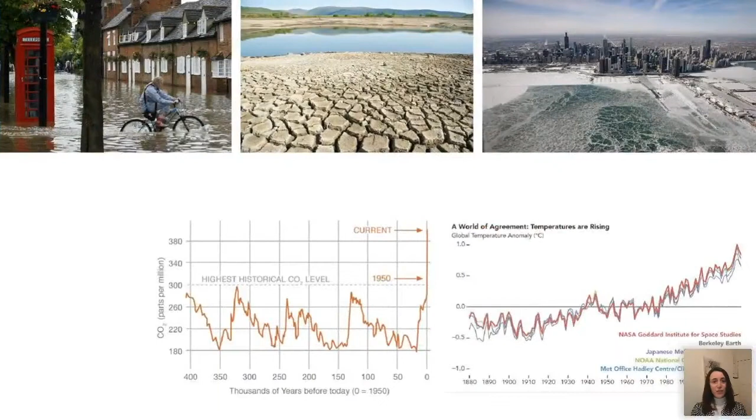So we are going to start with the presentation. First, before getting into the nitty-gritty, we want to give you a bit of background information.

Normally, the highest historical CO2 level has been around 300 maximum, and from the 50s, it has totally rocketed, and now it's over 400. We are following a trend that doesn't seem to stop, so CO2 emissions continue to grow.

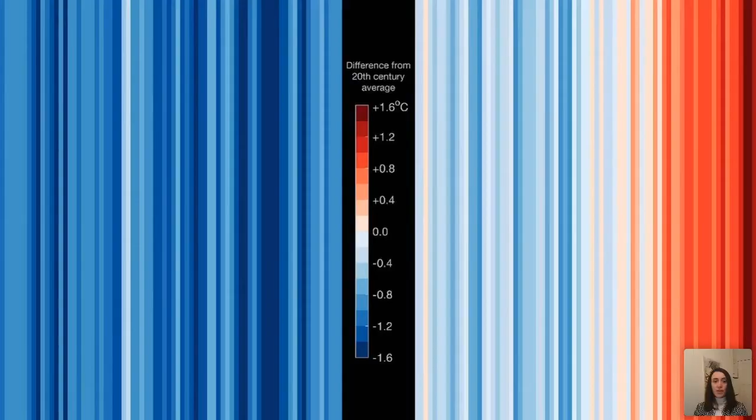But here we're going to talk about something positive, like what can we do? What can the built environment do to tackle climate change and to create sustainable cities?

We want to show you, as built environment professionals, to empower you and to show that we have a key role to play in tackling climate change.

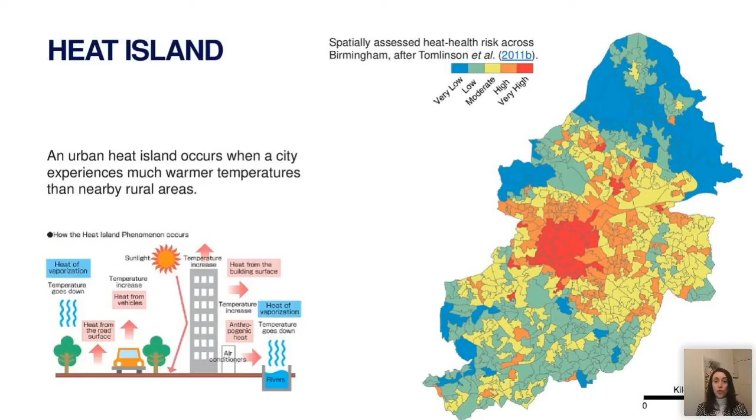And we can see the same with London. Temperatures in London are always some degrees higher than in other parts or in other cities in the UK and in other rural areas.

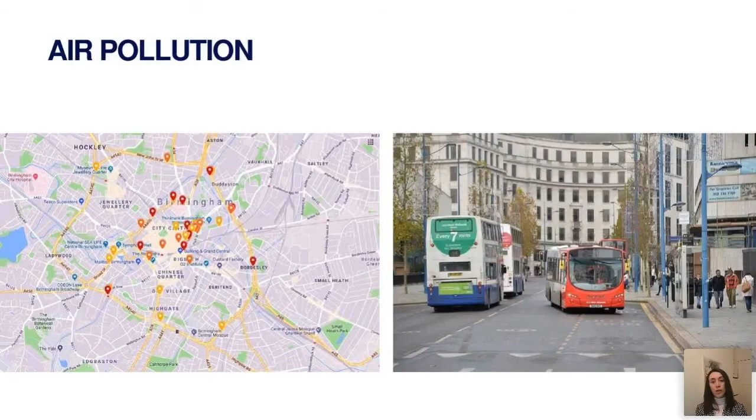This is regarding cities, but also the buildings that are in those cities. They also play a role in increasing the CO2 emissions. Cities in the end are responsible for over 70% of global energy consumption and CO2 emissions, and of that 70%, 40% is from buildings.

During the construction of those buildings and the extraction of materials, what we call embodied carbon, through all the construction phase, and then even the operation phase of the building, when we are, for example, in our houses, we are heating our houses.

That's the operational emissions. One thing is, in the UK, the building stock, our houses are quite old, and now there are targets of net zero carbon houses by 2050. But most of the houses that exist now, and the houses that we're going to build now, will still be there in 2050. So it's now when we have to act, now when we have to design houses that meet net zero carbon targets.

Also, at the moment, renovations affect just a very small percentage of buildings. So it's imperative, not just to design new houses that meet net zero carbon targets, but also to look at existing buildings. We really need to renovate and refurbish buildings to make them energy efficient.

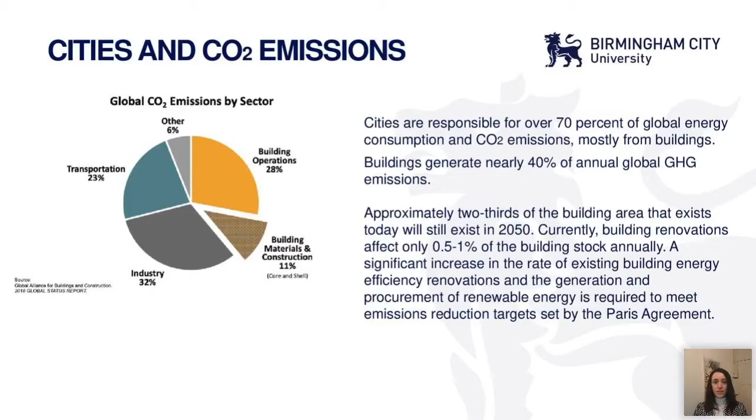One of the points we want to put across tonight is that we all work in the built environment. We contribute to cities from different angles. We have skills and competencies that are complementary, but we also work at different scales. In planning, which is my discipline, we work at a wider scale, looking at cities, regions, interconnections, and we also go down to smaller scales, the residential area, the community area.

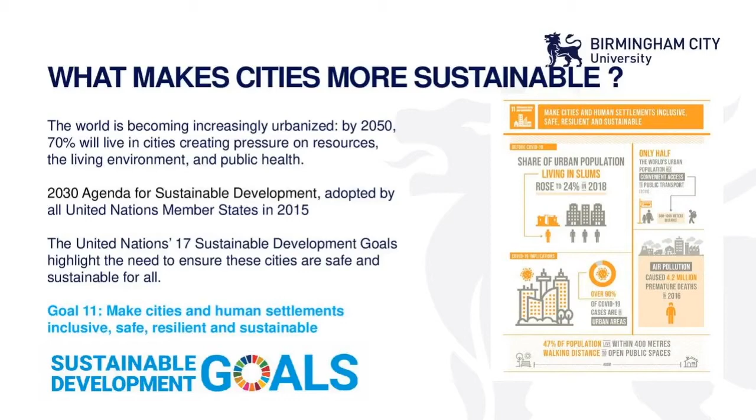So the question for me is about what makes cities more sustainable and how we can contribute towards that important target. A few considerations that complement what Monica was mentioning before: the world is becoming increasingly urbanized, and this was taken into account in 2015 with the 2030 Agenda for Sustainable Development, which you're probably familiar with. So what is it that planning can do for sustainability?

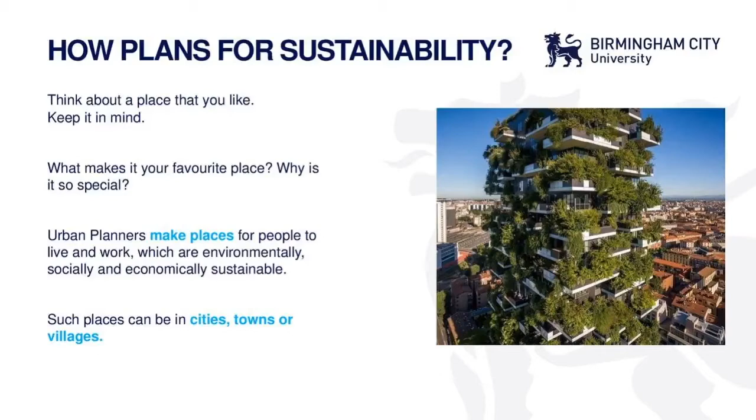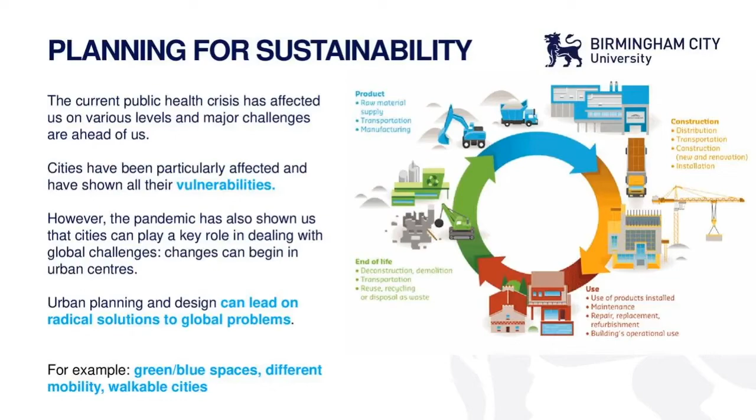I'd like to invite you to think about a place, some towns or villages, in very different contexts. The way we design cities and communities, and the pandemic, has shown us that cities can play a key role in change, and that these changes can have long-lasting positive effects in relation to global change. So I'd like to focus on open spaces, different forms of mobility, and different ways of designing and planning locally.

During the pandemic, new light was shed on how we experience cities and different spaces. Green spaces have shown to be extremely important on a daily basis, as a way of leaving our houses, doing some exercise, being more mobile, and generally finding areas contributing to our well-being. So proximity to green spaces has proved vital on a daily basis, particularly for our well-being.

Larger parks can provide locations where people can walk, run, cycle, play and train, while smaller gardens closer to where we live, in our neighbourhoods, have been a daily destination for a great variety of people, including families and children when playgrounds and schools were closed. So green spaces can play an important role in cities, environmentally and socially speaking.

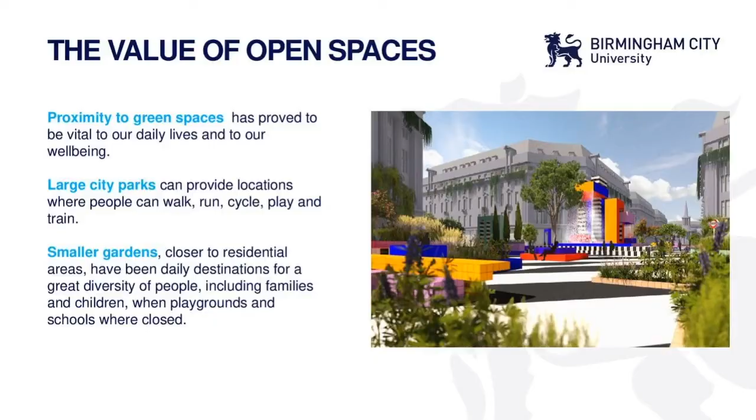Green spaces can vary in size and format. So when I talk about green spaces, I don't only mean large parks, but also local allotments, community gardens, and pocket gardens. Green spaces have a very positive environmental role: they absorb CO2, release oxygen, and play a great role in relation to biodiversity. But they also offer opportunities for leisure time and well-being. Recent research into the physical and mental health benefits of time spent in green spaces shows that even just spending two hours a week in a green space can have long-lasting benefits.

We've mentioned the mental health benefits of spending time in green spaces, but they are also socially very important. Green spaces are suitable for different types of activities and engagement, perhaps at different times of the day or week, and in that way they accommodate different members of communities and different age groups. So green spaces hold great potential for being inclusive and diverse environments. Together with green spaces, we cannot forget blue spaces.

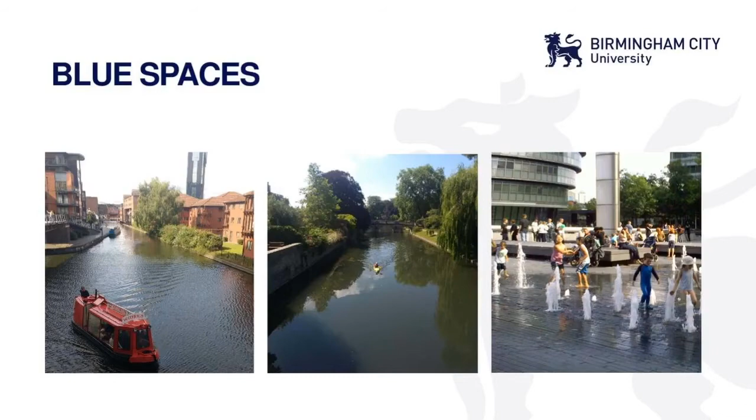And again, blue spaces can be of different types, and the benefits of blue spaces in relation to the physical and mental health of people has been proved. So facilitating and allocating such spaces in cities, in communities, is extremely important.

We talked about open spaces as very important, whether green or blue, for the environment and for people. The second aspect extremely important for our cities that has been emerging quite strong is walking, running and cycling in the city as an alternative to private or public transport.

This is particularly important because a large number of people live in urban areas where pollution levels are often well above the legal limits, and that has affected us health-wise in different ways, with respiratory issues but also increasing the chance of early death. Another important aspect, particularly for the purpose of this session, is that outdoor pollution affects indoor pollution. So what happens in the cities is actually affecting our own indoor space at home.

So how can we make our cities and communities walking, running, cycling friendly? How can we reclaim cities from traffic? How can we encourage cycling across different age groups, even children, on their own bicycles?

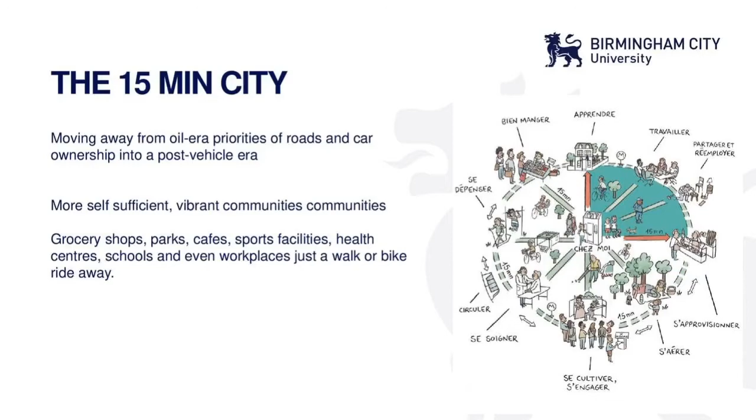So how do planners work? I would like to show some of the work that our students produce, and also give you an idea of how we approach cities, neighborhoods, and relate to city spaces.

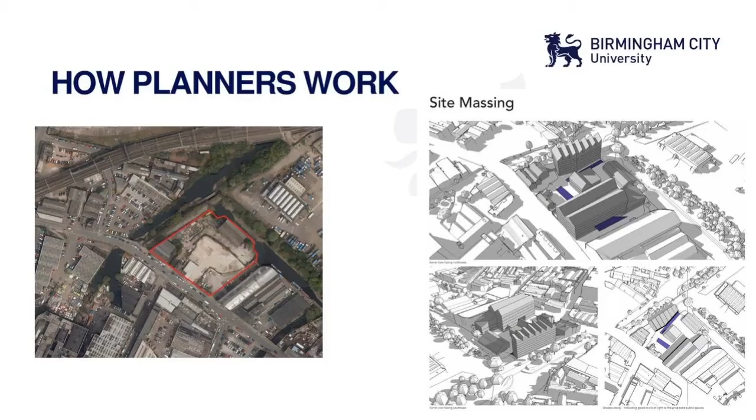What we do is work across different scales. And what we look at, as I mentioned earlier, is the big picture - how sites are connected with each other, how they are connected within the city, what happens in terms of new infrastructure, for example new developments, and what is likely to happen within a period of 10 years.

We also relate to other, more specialized built environment knowledge, for example on the environment, on green infrastructure, on biodiversity. As the student was highlighting, we looked at this specific site in Birmingham and how it is related to green infrastructure, how it is positioned, for example, with historic canals, and this can offer opportunities for rethinking how we can transform this empty or almost empty space.

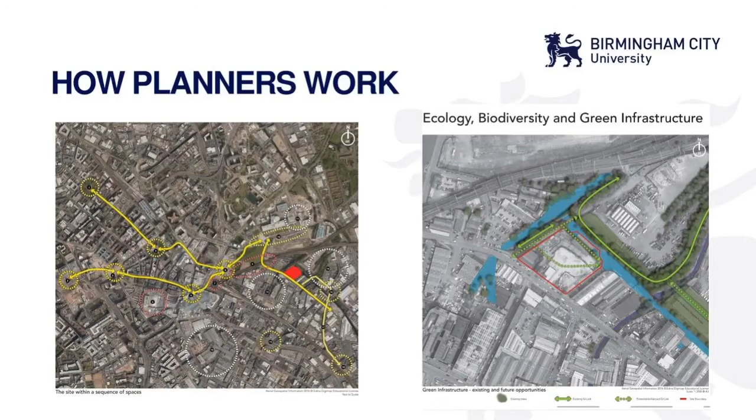So we need to think about how this relates to the multiple things that happen around the site. This could also mean looking at the surrounding land uses. What happens around that? Are there new developments coming up? Are there listed buildings? Is it perhaps a conservation area? Or is there a new major infrastructure, like HS2, coming up nearby? And what does that mean for my site, my area, and what are the implications for the future?

It was also important to look at the constraints, but also the opportunities that this site in this specific context might offer differently, for example, from other areas in a city context.

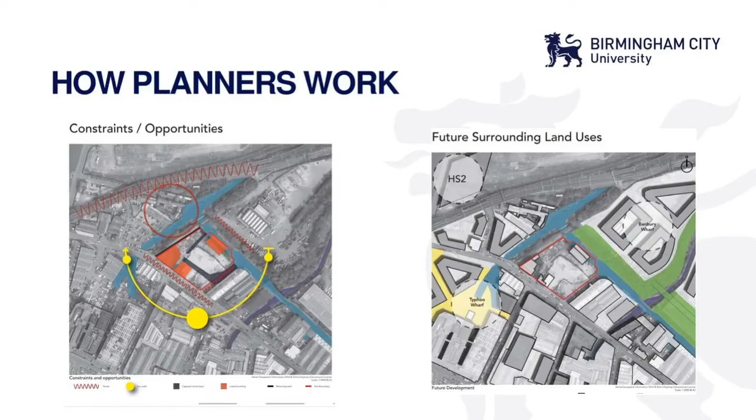Again, the context is important. What happens around it, what happens in terms of current connectivity, but also future connectivity, how my site is going to be accessible. What does it mean for it? What are the implications? Is it permeable? Is it easily accessible? Or is it something that I need to take into account to make it more attractive and more lively with a possible future transformation?

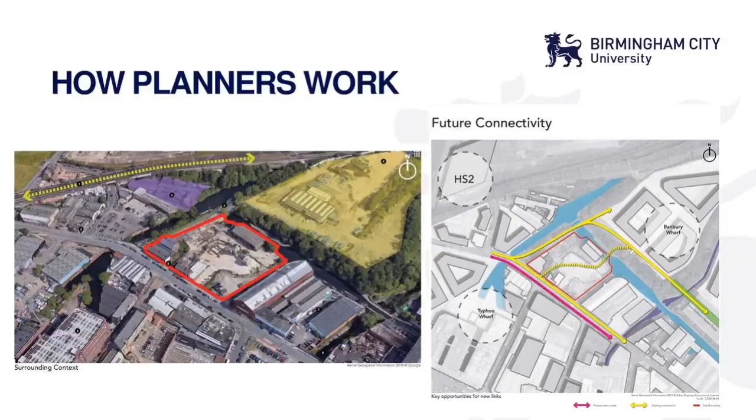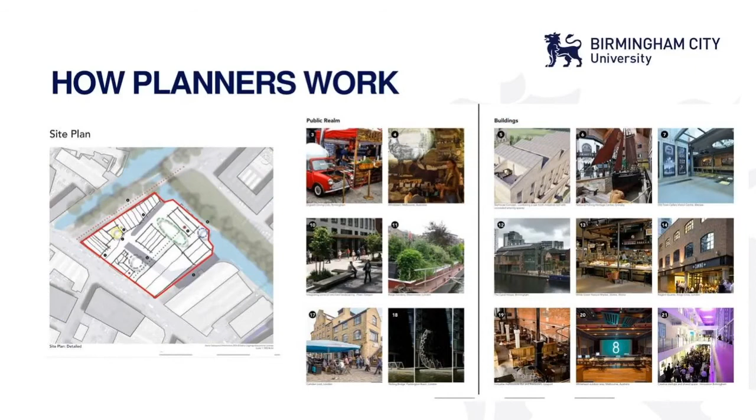And we also look at examples, cases. We draw upon other case studies, ideas, as the student did in this case, in finding ways to inspire possible transformations within a specific site and make it distinctive, a distinctive place that think in terms of environment, think about the social elements of the people who are going to use it, think about economic elements and the future of this part of the city, not as a site that is limited and bounded in itself, but talks and looks at the city and the future of the city.

Okay, thank you, Sylvia. And Sylvia has been talking about the perspective from cities. How can we make cities more sustainable? I'm going to cover now buildings, but both of them are linked because what happens outside influences what happens inside.

So I'm going to give you like a sort of an indication or a recipe of how can we make buildings that are not just sustainable in terms of carbon emissions, but also resilient against climate change. And on top of that, how can we create buildings, not just that they're sustainable and resilient, but also that provide healthy indoor environments for the people that live inside those buildings.

And we've seen that with COVID now. We are now spending a lot of time indoors, and maybe our indoor environments are not as healthy as they should be. So it's something that the professionals of the future will have to start thinking about.

And I always like to bring this slide because I always say that that's my motto. The cheapest energy is the one that is not consumed. So that's the best one. If we can design a building that doesn't consume any energy, that would be great because then we wouldn't have any emissions. But that's a bit tricky. That's a bit difficult. So we need in the end to find a balance.

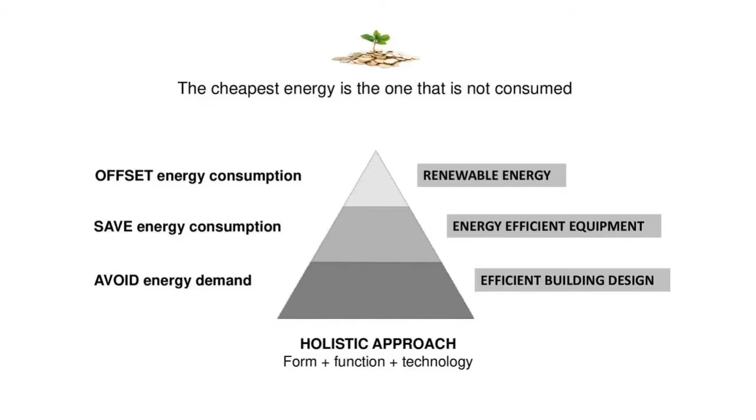After that, the second step would be, let's install efficient equipment to save energy consumption. And at the top, it would be installing renewables to offset any energy consumption. And it has to be always that way, because sometimes people, if they don't look at the buildings in a holistic way, and if we work in silos, we are not going to meet the net zero carbon targets, and we won't do a good job in that sense.

But as I said, we need to think also in how we can provide healthy indoor environments. So just I've been talking about that pyramid to conserve the energy, to make buildings very, very energy efficient, to seal them up, to make them very airtight. Imagine a bag. Imagine if you have a plastic bag and you seal that plastic bag so the air cannot go out and cannot come in.

And that's a problem in a house. Imagine that you don't ventilate. Imagine that you are in your bedroom watching TV or doing your homework. If you are in your bedroom, if you don't open windows, if you have everything closed, what happens after an hour, after 2 hours? It starts getting stuffy because the CO2 starts building up.

So the point of making houses very airtight, to sealing them, to meet the targets, to improve the energy conservation and to reduce the energy bills, is that we create unintended consequences such as poor air quality and overheating. So we need to find the right balance of how to improve energy efficiency of buildings, to create sustainable cities, sustainable buildings, and tackle climate change, but also creating healthy indoor environments.

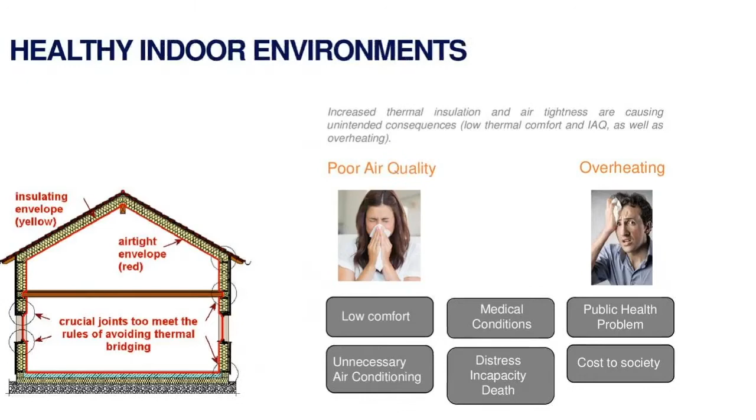How can we do that? Well, this is like a sort of recipe of how we can improve the energy performance, but providing healthy indoor environments. Following with that pyramid, we would have at the bottom things such as passive design. We need to first look at the site and to create a resilient and a good design, looking at thermal mass, buffer zone, super insulation, some concepts that I'll explain in the next slide.

As we mentioned before, efficient equipment, and at the top, renewables. But I'm adding some other bits for new homes and existing homes to make sure that we don't just improve the energy performance, but we also improve the air quality and provide healthy indoor environments.

Such as emission of materials. Some of them have particulate matter or volatile organic compounds, so low emission of building materials. Ventilation, that's key, as I mentioned before.

Equipment and appliances, they have to be low pollutant. For example, wood burning stoves or gas stoves can emit nitrogen dioxide. So we need to think about what sort of appliances we install. Also the extractor fans in kitchens, we really need powerful extractor fans to extract all the pollutants from cooking. We'll see an example later, and you will be impressed by that.

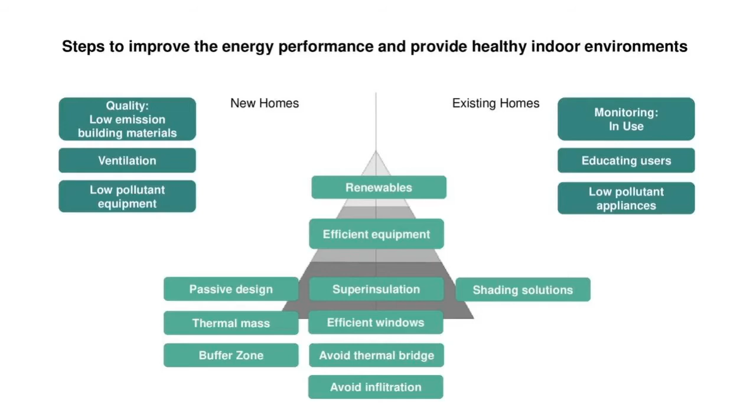Also monitoring, because by monitoring and seeing what's going on in your house, it's really interesting, because in the end, you make some choices that you wouldn't make if you didn't have those monitoring sensors.

So as I mentioned, things like passive design. When we mention passive design, things to consider, such as harnessing the power of the low winter sun, but also preventing overheating in summer, making the most of the natural ventilation.

Thermal mass is the ability of a material to absorb and store heat energy, and then it absorbs during the day and releases the heat at night. That's thermal mass, and there are some materials that are better for that than others.

Buffer zone is about the layout of the different rooms in the house. Cold rooms should go to the north, and warm rooms should go to the south. That's buffer zone. And also shading solutions.

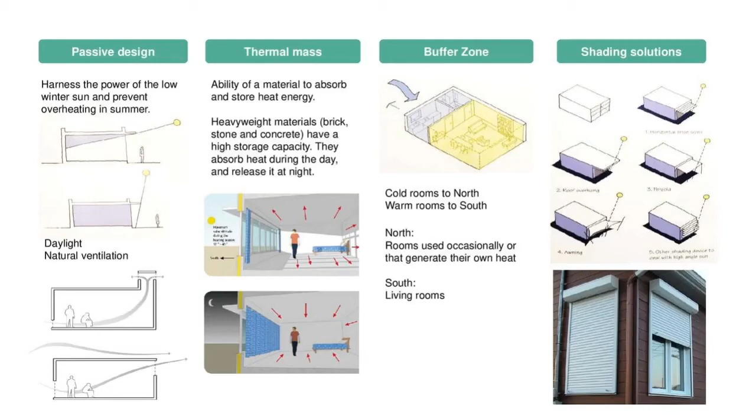With the warming temperatures, we are seeing summers that are hotter and hotter, and the temperatures are rising. We are starting to see more problems with overheating. So why not think of shading solutions? Because if we don't let the sun in, then we will have fewer problems of overheating.

Here, for example, are some examples from our students showing how they analyze the sun path and the prevailing winds, not just by drawing with concept sketches, but also using software to analyze the sun path.

On the right hand side, it was for installing a PV panel, and also for the design of the building. It was an existing building, and students had to do a low carbon refurbishment. So we analyzed the sun path, and other things like prevailing winds, or where the trees are, or other constraints.

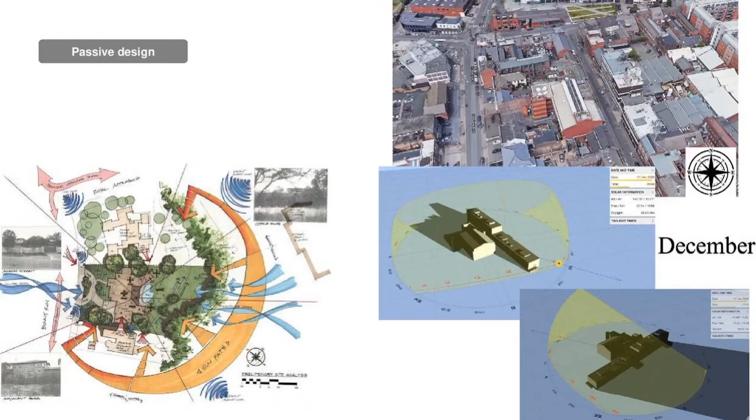Also, in terms of insulation, we need proper insulation. You can see there a little drawing of a house showing the typical heat losses through the roof, walls, floor, and window, which are normally around 25-30%. If we improve the insulation of the roof, walls, floor, etc., we'll conserve quite a lot of energy in our houses.

The thing is, we can insulate either on the inside of the house or on the outside, as you can see on the left hand side. Also install good and efficient windows, double glazed or triple glazed, as we would do in a passive house.

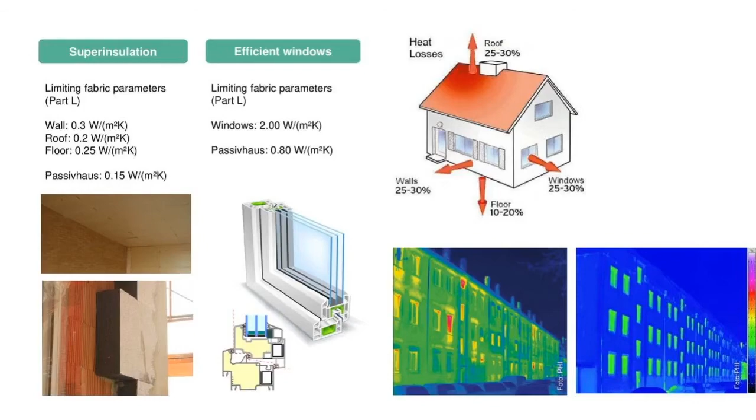On the right hand side at the bottom, you see the same building before and after installing external insulation, captured with a thermal camera. You can see there is a huge difference in the performance of that building after installing the exterior insulation.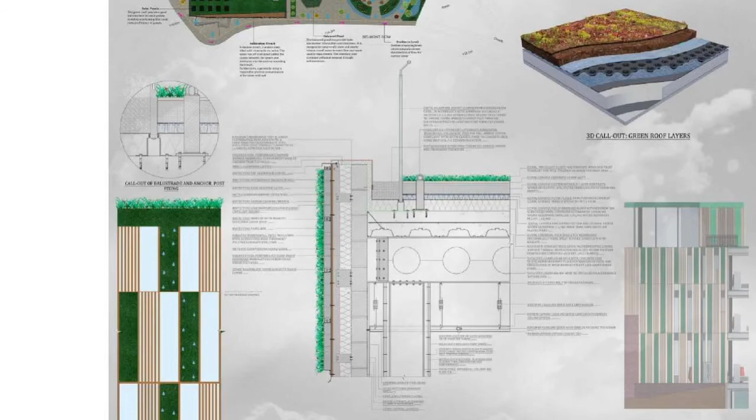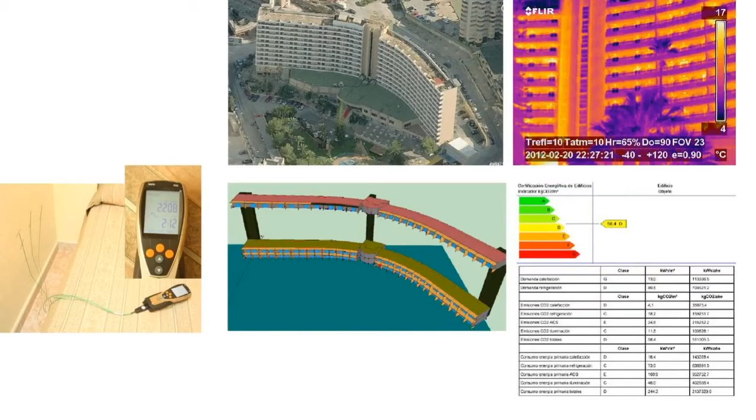But not just projects from students, also our own research, the sort of research that we do, which we also bring into the classroom, and then students can work on those case studies.

This is an existing hotel where, with a thermal camera, we looked at the heat loss, the key areas where there was more heat loss from inside the building. We also used equipment to monitor the U value, the thermal transmittance, and with that data we put it into software to calculate the energy performance specific to that building. From that, we can propose solutions for improving its energy performance, and students can also work on these case studies.

For improving energy performance and avoiding heat loss, it's very important to address thermal bridges. A thermal bridge, sometimes called a cold spot, is where there is a discontinuity in the insulation and heat escapes, because heat always transfers from where it's warmer to where it's colder.

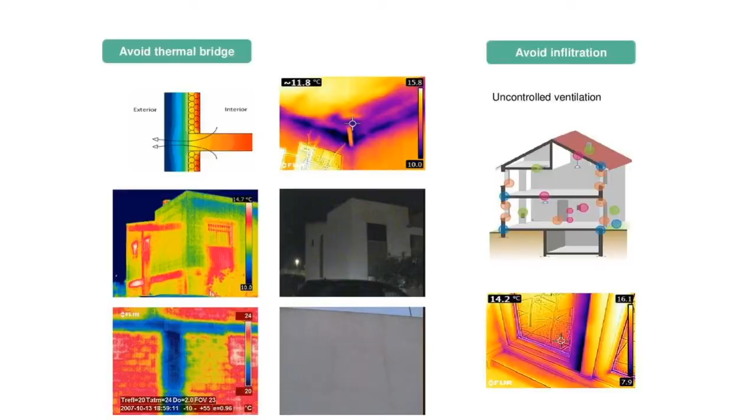This is a project my students did last year, on the School of Jewellery in Birmingham, which is a listed building. We took photos with the thermal camera. Some of those windows are single glazed because it's a listed building, and the thermal images show there is considerable heat loss through the windows. So students had to propose measures to improve the energy performance of that building.

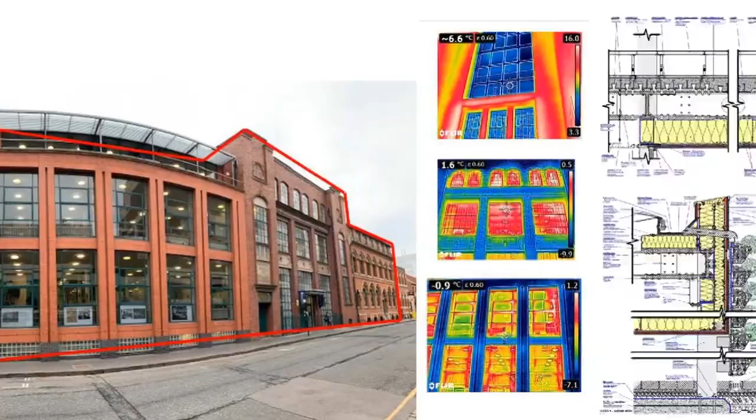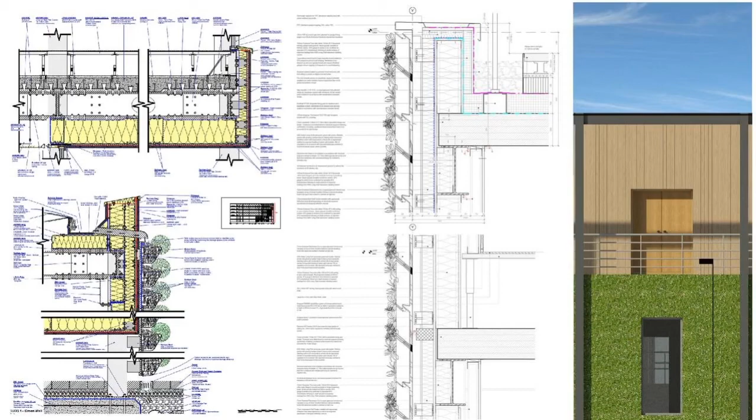Also, architectural technology students in their final year have to design a building and create all the technical details. In these details you can see there is no thermal bridge - the insulation is totally continuous - but at the same time the designs are really interesting and novel. This demonstrates that we can have buildings that are appealing, with very good design, but also sustainable and energy efficient.

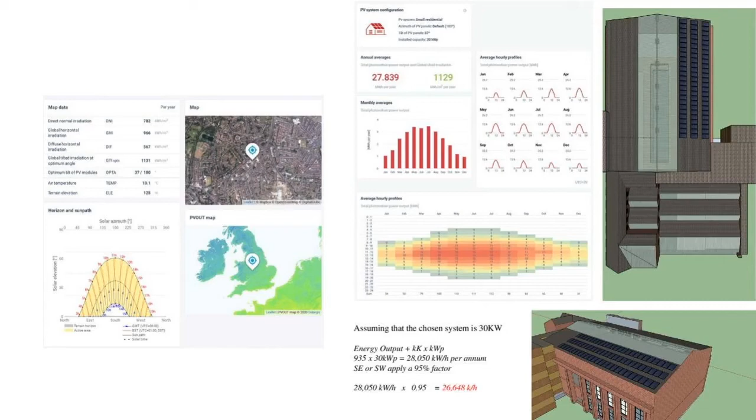As we mentioned, efficient equipment and renewables are important. Here's another example from a team of students that installed photovoltaic panels, and they did all the calculations to make sure they had the right number of panels to meet the demand.

As I mentioned before, low emission building materials matter. For example, some carpets and paints have high emissions, so we try to reduce that.

Monitoring - we can monitor lots of things: temperature, humidity, carbon dioxide, carbon monoxide, even ozone levels, since there is ozone also inside our houses. Nitrogen dioxide doesn't come just from traffic - if we have gas stoves or burning stoves, we'll also get nitrogen dioxide and particulate matter, pollutants that are not healthy, particularly with long exposure. If we're exposed for a short time, just an hour or so, it's fine.

The point is, when there is continuous exposure to those pollutants, in the end we want to be comfortable. The comfort temperature is between around 19 to 22, 23 degrees, something like that. And the humidity to be comfortable is from 40 to 60%.

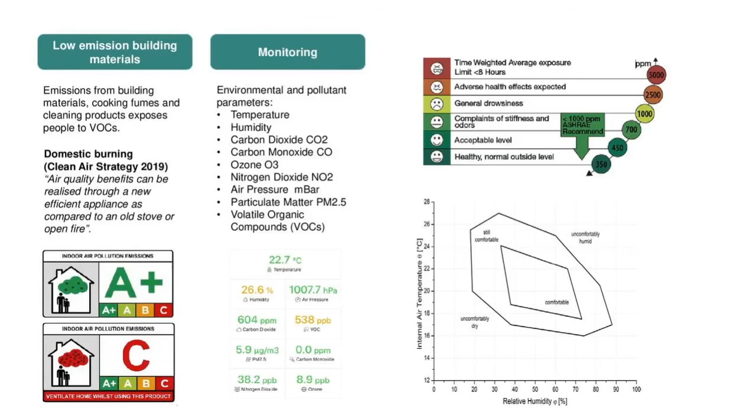CO2 is also important. If we don't ventilate, once we go above 1,000, it starts to feel stuffy, and then we have headaches, drowsiness. So these things are important to be in indoor spaces and to feel healthy.

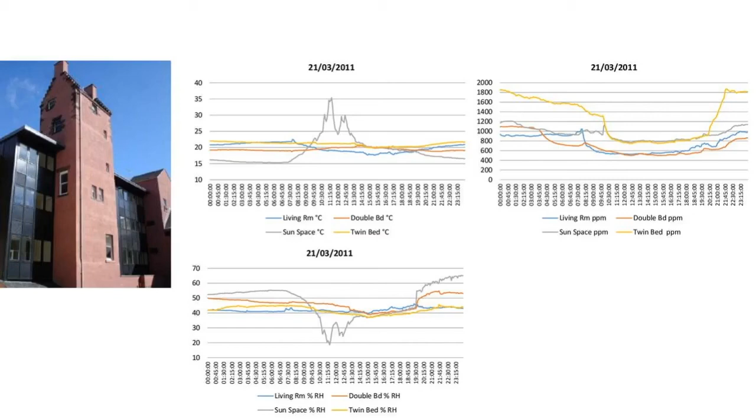So we have monitoring sensors, and we analyze these things. We monitor indoor environments, and we also do some research activities with students.

This is another example, from a gas stove doing a normal roast, the typical Sunday roast that maybe our parents or we cook during the weekends. You can see if we do it on a gas stove, the levels of nitrogen dioxide are really, really high, they go up to the top. That's really interesting and also dangerous.

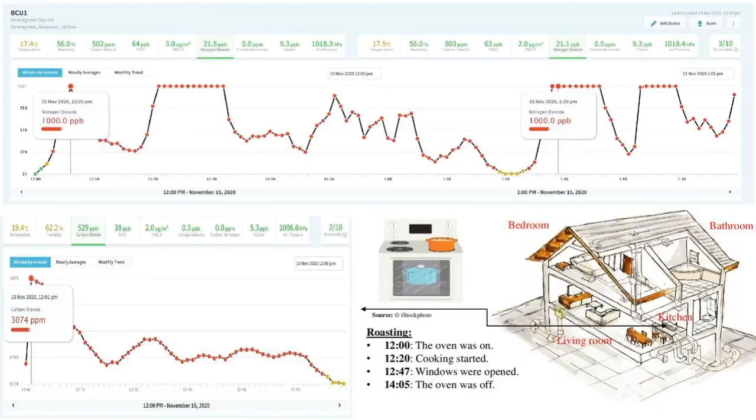So up to now, after showing a bit of a recap, the key things to consider for having buildings that are energy efficient, resilient, and also provide healthy indoor environments, what can we do as professionals in the built environment? I feel empowered with this particular topic area, because I do think that we can really make a change. We can really contribute to tackle climate change from our profession.

There are challenges and opportunities, because the global building stock will double in area by 2060 as the population in the world continues to rise. Most of the population are concentrated in urban areas. By 2060, two thirds of the expected population of 10 billion will live in cities.

At the same time, if we need to address the CO2 emissions that are increasing, we really need not just to build lots of houses, lots of buildings, but at the same time to make those buildings sustainable.

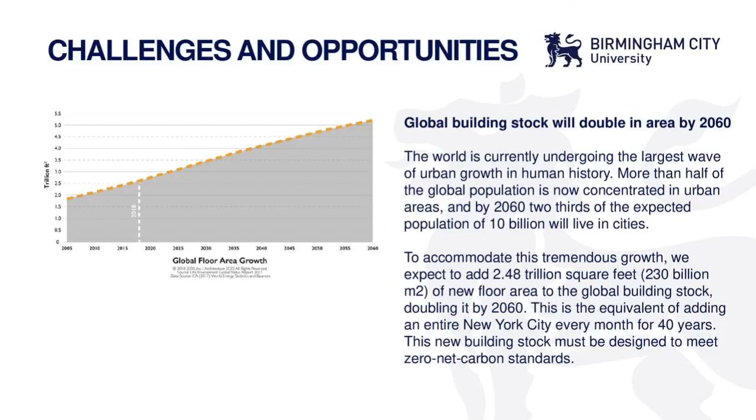Here in the UK there are also lots of career opportunities in the built environment. For example, in 2018, the contribution of construction to the UK economy was 117 billion, around 6%, and 2.4 million jobs directly related to the industry in the second quarter, around 7% of UK total. It's a very big industry, the construction industry.

The industry is growing fast, and there are lots of opportunities. There are lots of people retiring in the next 10 years, and we need every year around 700,000 people in the industry.